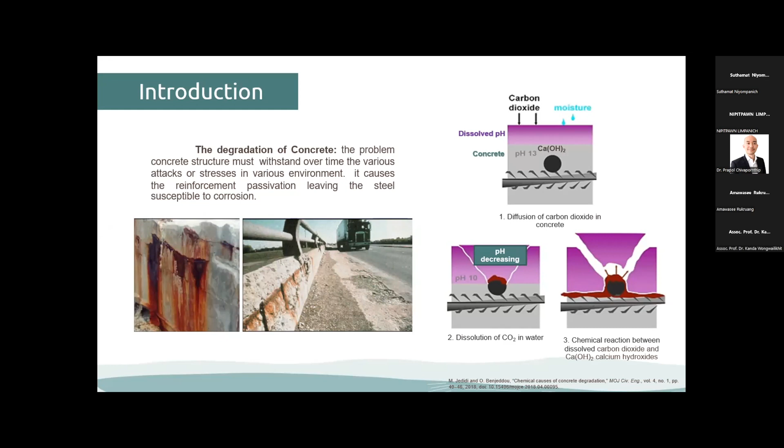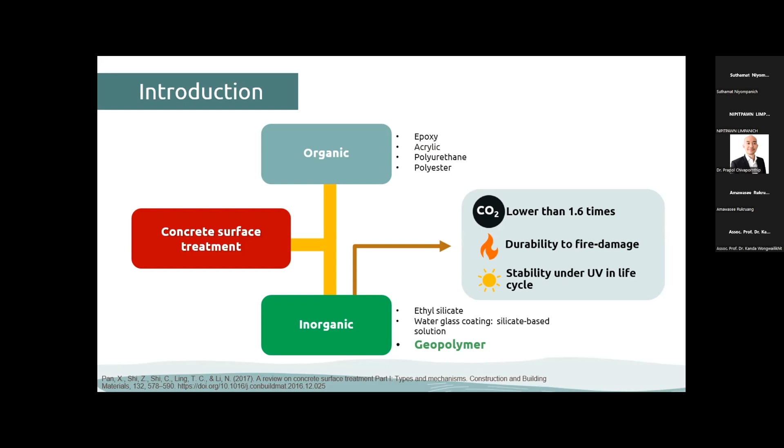Concrete surface treatments can be divided into two types: organic coatings and inorganic coatings. Organic coating is the most commonly used due to its good protective performance. However, there are concerns about limited service life, instability under UV light, and durability in fire resistance.

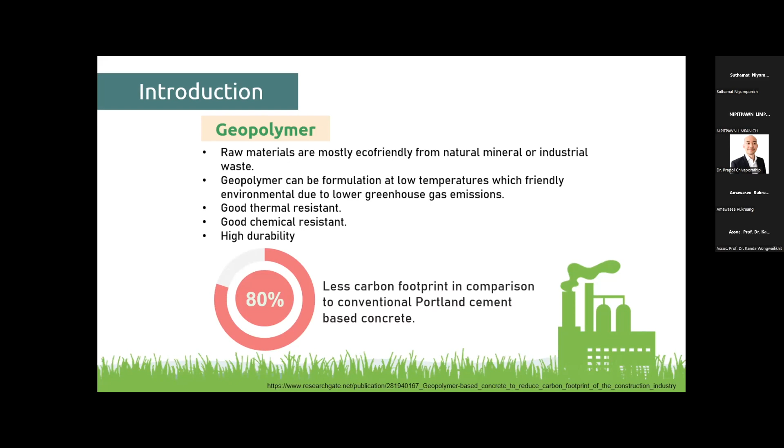Geopolymer coating is a class of new inorganic coating whose raw materials are mostly eco-friendly, from natural minerals or industrial waste. Geopolymer can be formulated at low temperature and is environmentally friendly due to lower greenhouse gas emission, with good thermal resistance, chemical resistance, and high durability.

Geopolymer is a cross-linked aluminosilicate structure synthesized by geopolymerization of aluminosilicate powder with an alkali solution to get the geopolymer slurry, which is used for spray coating in this research.

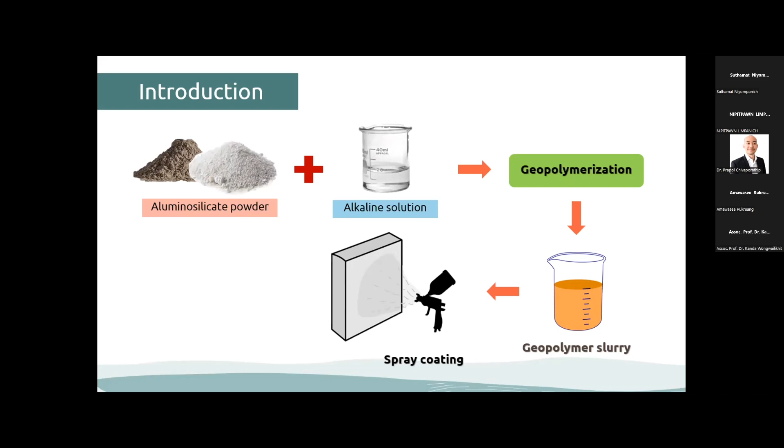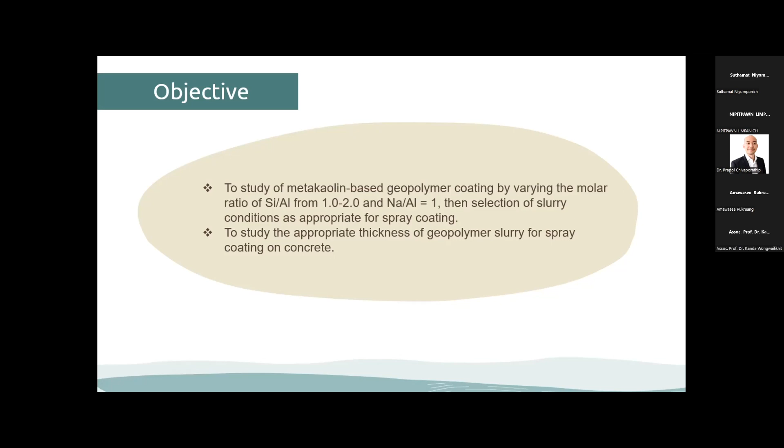The objective is to study metakaolin-based geopolymer coating by varying the Si/Al molar ratio from 1 to 2, with Na/Al equal to 1, then select the slurry condition appropriate for spray coating and study the appropriate thickness of geopolymer slurry for spray coating on concrete.

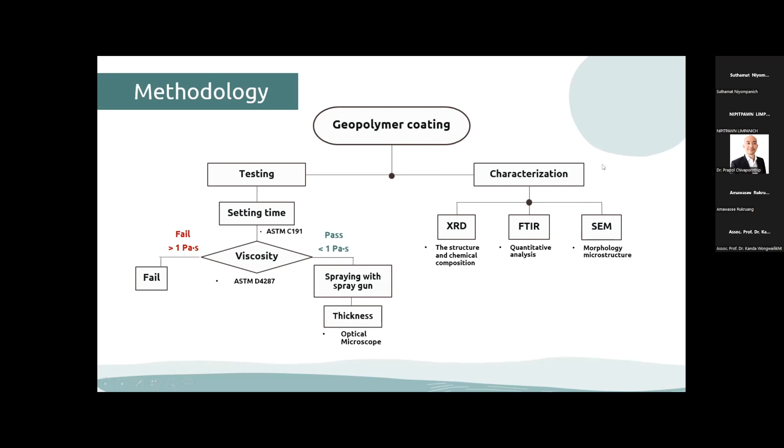The flow chart for the experiment: first, the setting time of the geopolymer slurry and the viscosity are tested to find what is appropriate for spray coating, following ASTM. Then spraying with the spray gun and investigating the thickness, with characterization by XRD, FTIR, and SEM to investigate the geopolymer slurry.

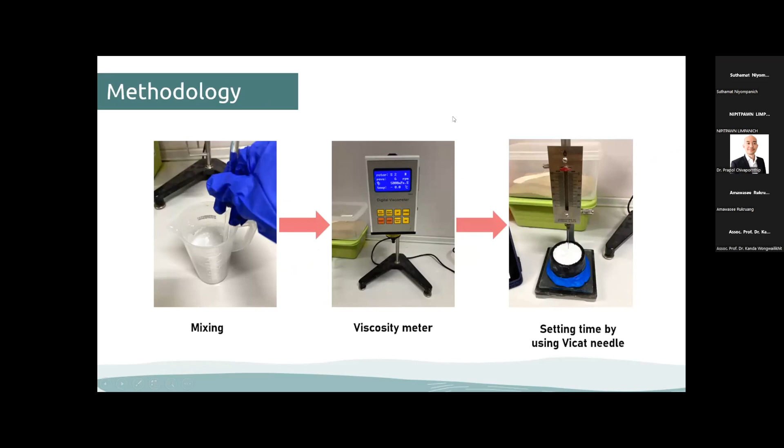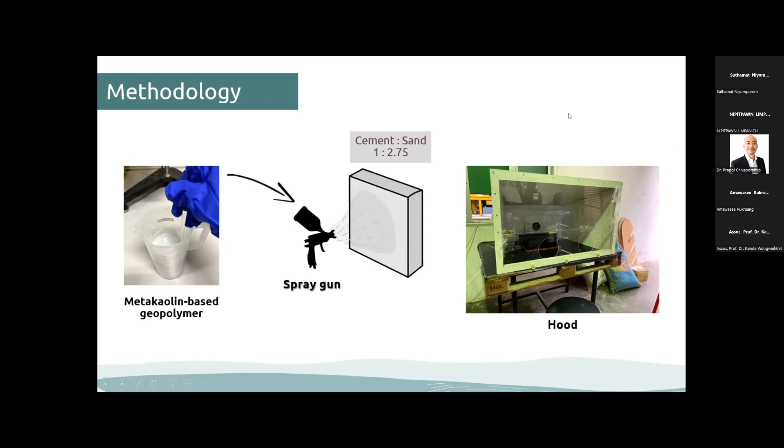The methodology was mixing all of the raw materials and testing the viscosity and setting time, then putting the geopolymer slurry into the spray gun and coating the cement mortar, curing it, and getting the results and discussion.

However, mixing the specimen with Si/Al equal to 2 was unsuccessful because the sodium ions from the sodium hydroxide were insufficient to dissolve the metakaolin.

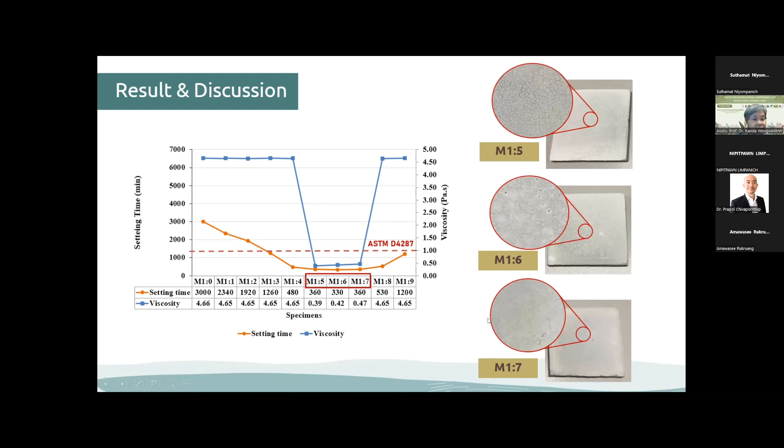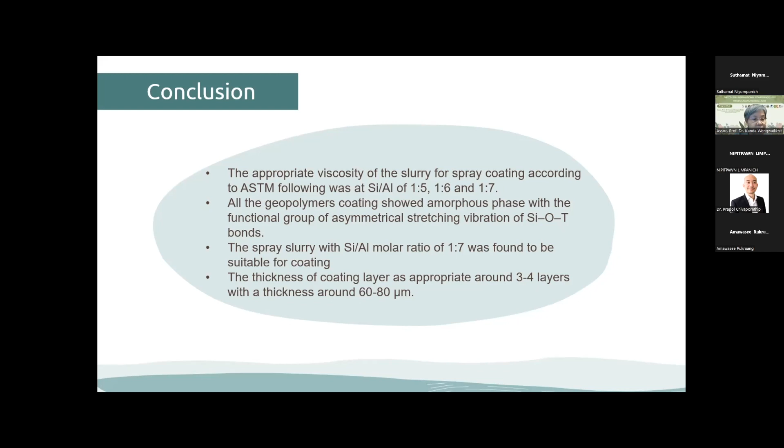In conclusion, the appropriate viscosity of the slurry for spray coating according to the ASTM was at silicon to aluminum molar ratios of 1.5, 1.6, and 1.7. All of the geopolymer coatings showed the amorphous phase with the functional group of the asymmetric stretching vibration of the Si-O-T bond, and the spray slurry with a silicon to aluminum molar ratio of 1.7, was found to be suitable for the coating, and the appropriate thickness of the coating layer was around 3 to 4 layers with a thickness around 60 to 80 micrometers. Thank you for your attention.